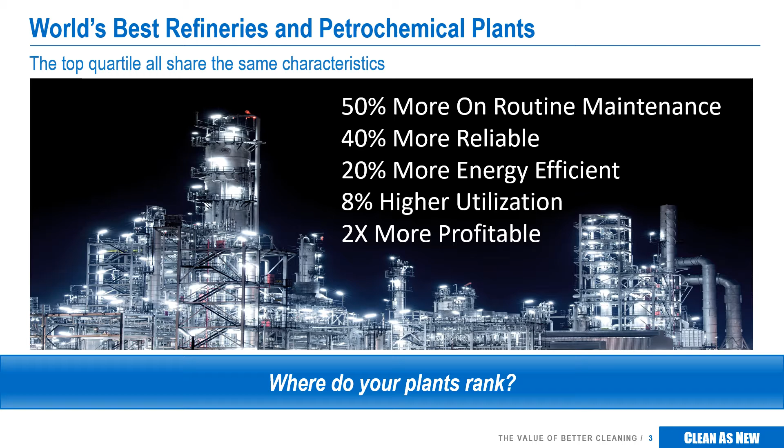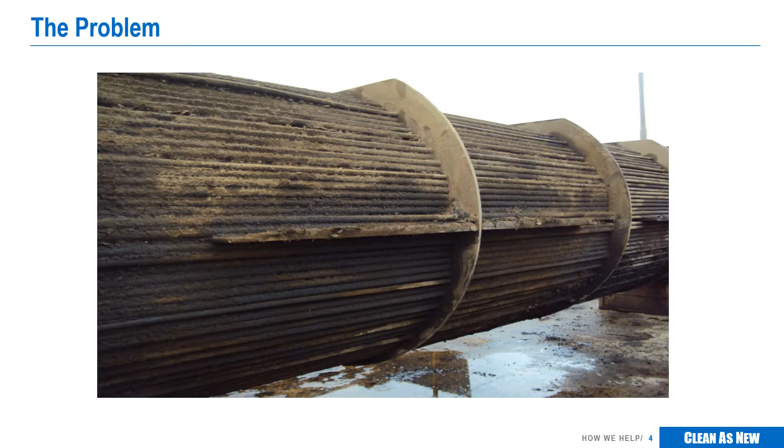Inexpensive feedstocks are a core part of margin strategy, representing 80% of site costs. With these feedstocks come significant processing challenges caused by heat exchanger fouling. The fouling of heat exchangers reduces plant efficiency, and one of the biggest maintenance challenges the industry faces is removing this fouling and restoring plant performance. Unfortunately, today's cleaning methods seldom return heat exchangers back to service above 80% of the design spec. That's the problem that Clean as New solves.

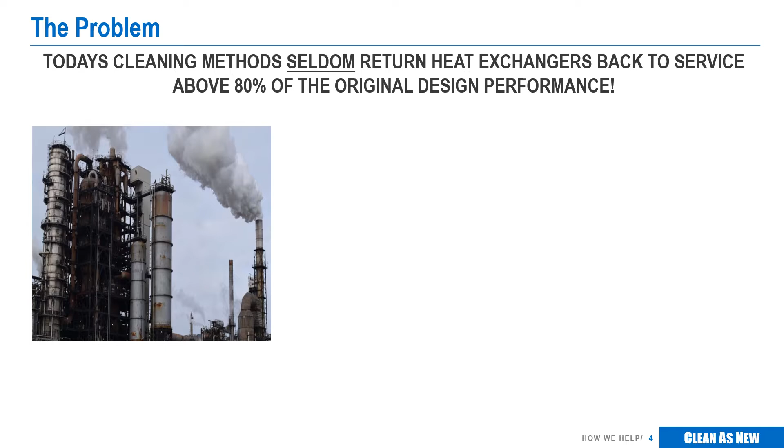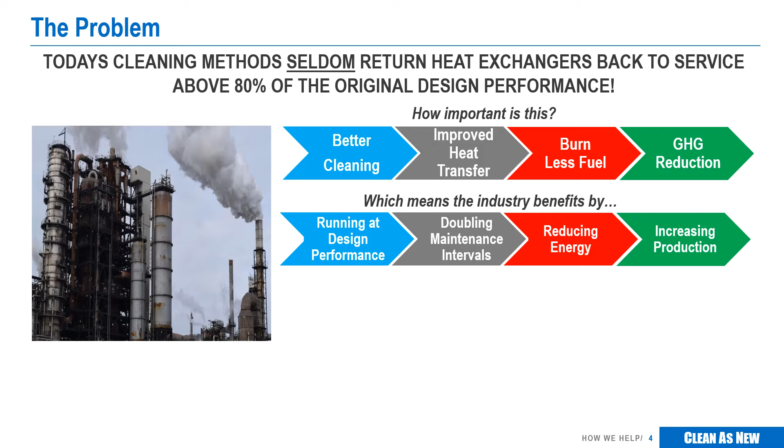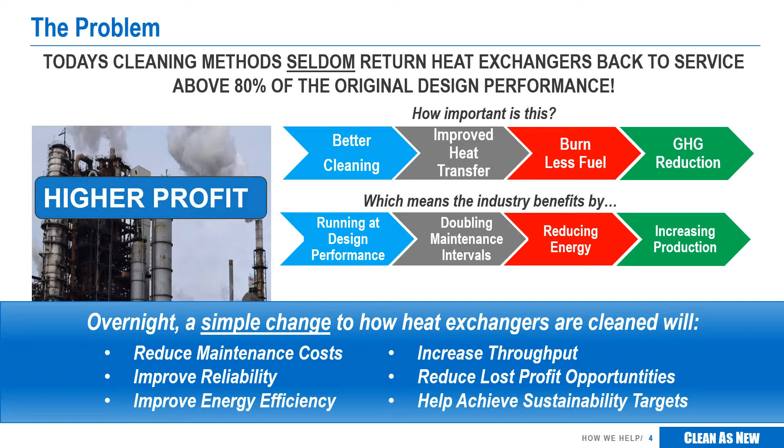Our approach to cleaning allows return to service performance of over 95%. So how important is this? Better cleaning improves heat transfer, which in turn reduces fuel consumption, and best of all, it lowers greenhouse gas emissions. But that's just part of it. Better heat transfer also improves plant performance, lengthens maintenance intervals, reduces energy cost, and increases production, all of which leads to higher profits. Overnight, a simple change to how heat exchangers are cleaned will help our clients address the market pressures, meet their ESG commitments, and improve their bottom line.

For the past few years, we've been developing a simple model to understand the value that cleaning heat exchangers back to 100% of design performance would have on the U.S. refining market. Based on 135 refineries, our model calculates that the impact would be a $6.6 billion bottom line improvement, a 22 million ton greenhouse gas reduction, and a 3 billion gallon water savings, all on an annual basis. Despite numerous testimonials, case studies, and even a few refereed papers, people are understandably skeptical when they first hear these results. To validate our model and remove skepticism, together with our clients, we have participated in numerous measured cleaning trials, using the client's own data to prove that our model predictions are, in fact, correct.

Cleaning heat exchangers to 100% design performance has broad implications with respect to helping address the industry's environmental, social, and governance commitments. At Clean as New, we check all the boxes.

By cleaning heat exchangers back to a like-new condition, the industry burns less fuel, which results in lower greenhouse gas emissions. We're proud to say that we recycle 100% of our process water, using less than 3% of the water consumed today by conventional cleaning methods.

From a social perspective, we care about the safety of our people. Our cleaning process eliminates the risk associated with hydroblasting, reducing liability, and making the workplace safer.

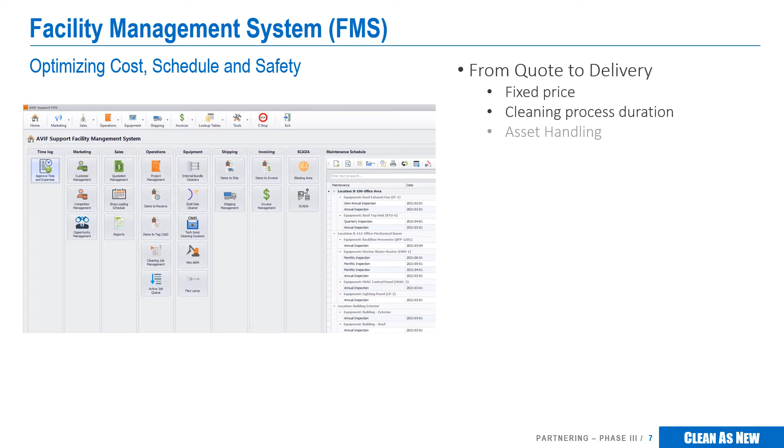We use a custom-built facility management system that tracks all aspects of cleaning operations. From the moment your cleaning service is quoted to the time it is delivered back to you, all aspects of the process are controlled, tracked, and recorded.

The process starts with a quote, including fixed pricing and a guaranteed schedule. For those concerned with schedule, Clean as New provides access through a portal that provides real-time asset tracking through the entire process. The system enforces process, environmental, and safety protocols to ensure the safety of your equipment, the environment, and our workers. Finally, you have access to all the data we collect about the cleaning of your equipment, which can be used to better plan maintenance and outage activities in the future.

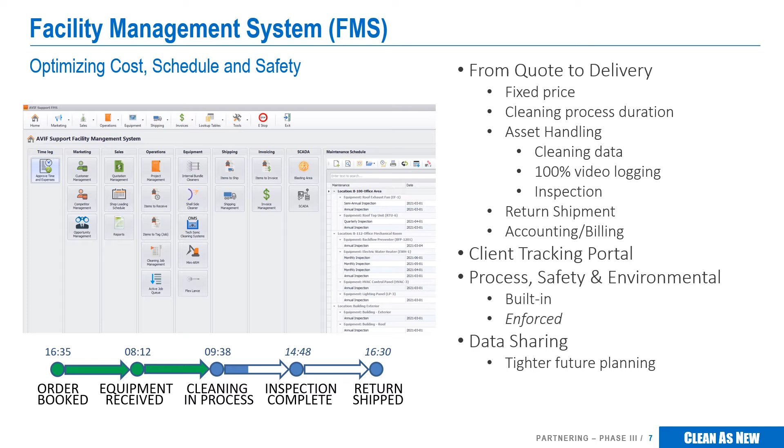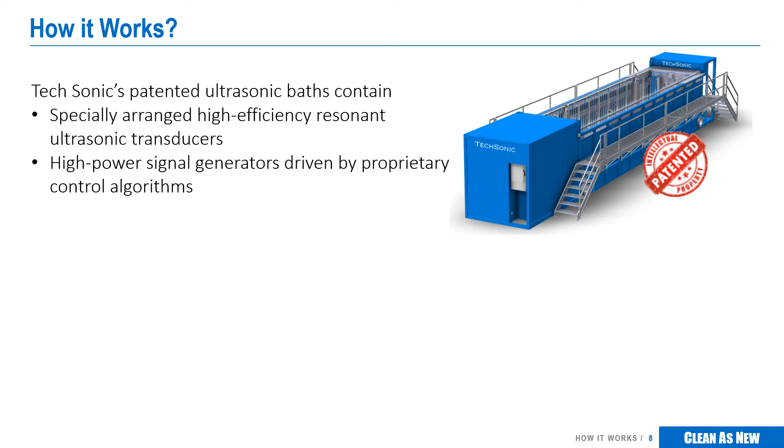It's worth spending a minute to describe Tech Sonic's ultrasonic cleaning technology. We've been building large-scale industrial cleaning baths for heat exchangers since 2009. Our patented technology uses specially arranged resonating rods to deliver precise, computer-controlled ultrasonic energy to our baths, which are filled with specially designed, safe, and environmentally friendly cleaning chemistries. Our unique design creates a uniform energy field within the bath, allowing the rapid cleaning of heat exchangers and parts.

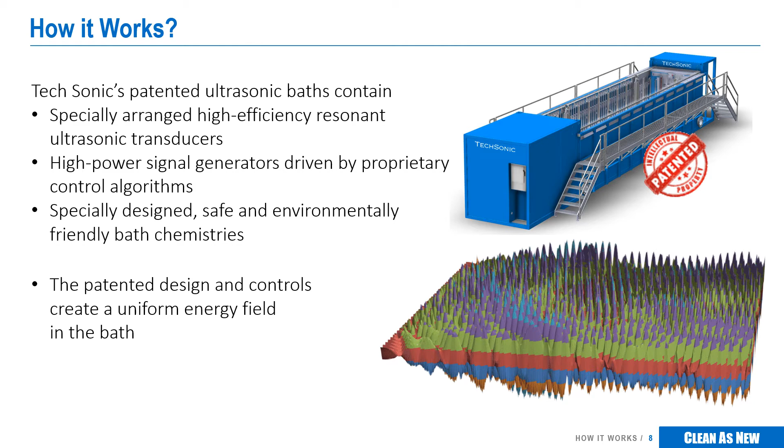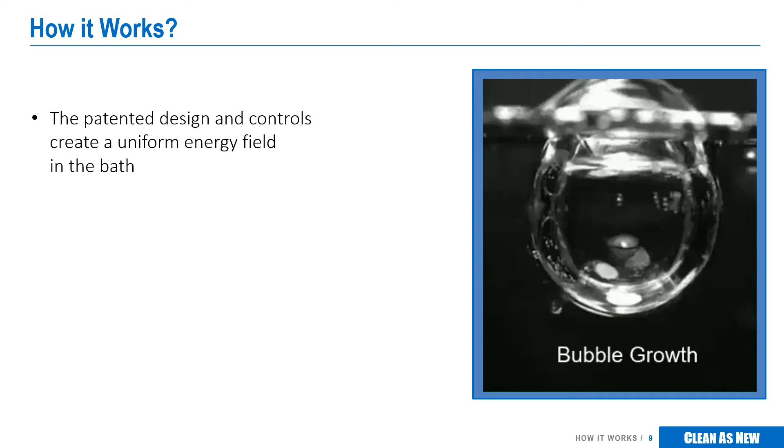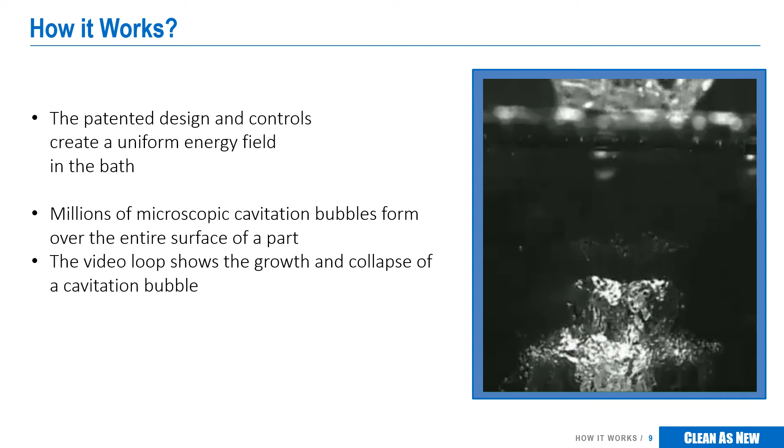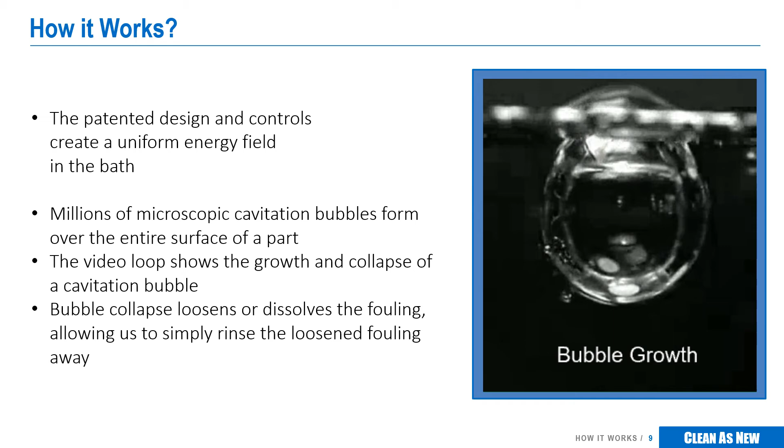Normally, in fluid engineering, cavitation is something to be avoided. However, in an ultrasonic bath, strong cavitation is vitally important because it's the imploding bubbles that do all the work. The ultrasonic energy causes the formation of millions of microscopic cavitation bubbles over the surface of the fouling on a part. The growth and collapse of one of these bubbles is shown in the video loop on the right. During the collapse, a tiny jet and shockwave are formed. These microscopic forces combine to do the work of loosening or dissolving fouling, which allows us to simply rinse the loosened fouling away.

This model simulation shows how better cleaning of a heat exchanger can improve performance. We'll see a real example of this later in the presentation, but for now, consider a typical heat exchanger.

It begins operation at 100% of design capacity. However, as time passes, fouling starts to build up on the surfaces, reducing the operating performance. During the induction period when the exchanger is clean, the initial fouling velocity may be slow, but this will accelerate as fouling collects on the surface.

In this example, we are showing that the bundle is cleaned at a regular interval. For most bundles, hydroblasting alone can never get the bundle back to 100%, so over several successive cleanings, the restart performance continues to degrade.

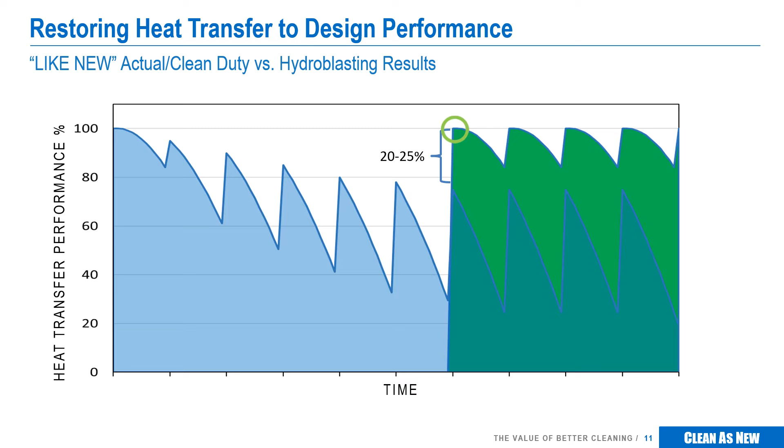Clean as New solves this problem. Our approach allows the bundle to be returned to service at 100% of design capacity. In this particular fouling model, because of the difference in the shapes of the two curves, a 20 to 25% improvement in return to service performance results in a 34 to 38% performance improvement over the next interval.

There's another benefit that this simulation highlights. By using the same fouling level as the trigger to clean the bundle, rather than the same fixed interval, better cleaning offers the opportunity to more than double the run length, reducing maintenance costs and improving production, while still reducing overall energy consumption.

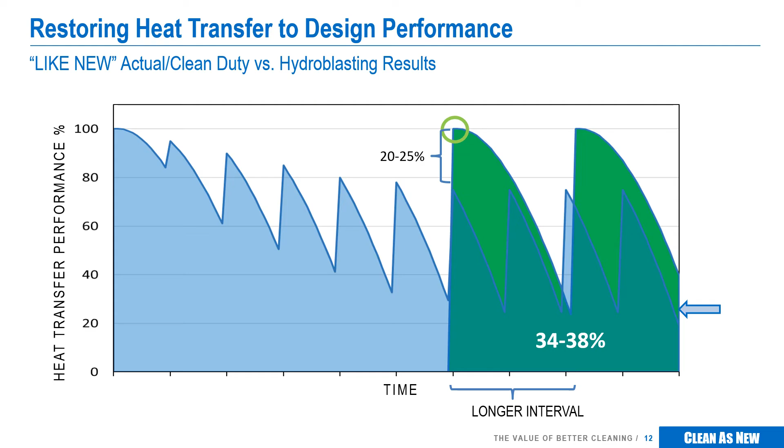We're serious about proving the value of our technology and earning your trust. To do this, we have a three-phase approach.

First, we will work with you to prove that the way we clean heat exchangers will reduce your costs and improve heat transfer performance. Next, we want to prove that we can deliver these results consistently. And finally, after proving the value of our approach to cleaning, we will provide you with a long-term heat exchanger performance solution.

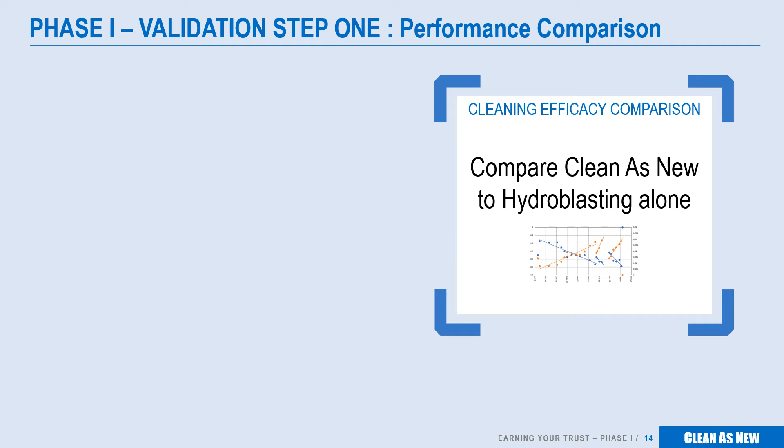The first phase is a set of measured trials, and in the first step, our goal is to validate using your own data that our cleaning delivers the improvements we are promising. This includes free bundle cleaning from each of your plant's crude preheat, FCC, coker and cooling water services. That's 4 bundles cleaned for free.

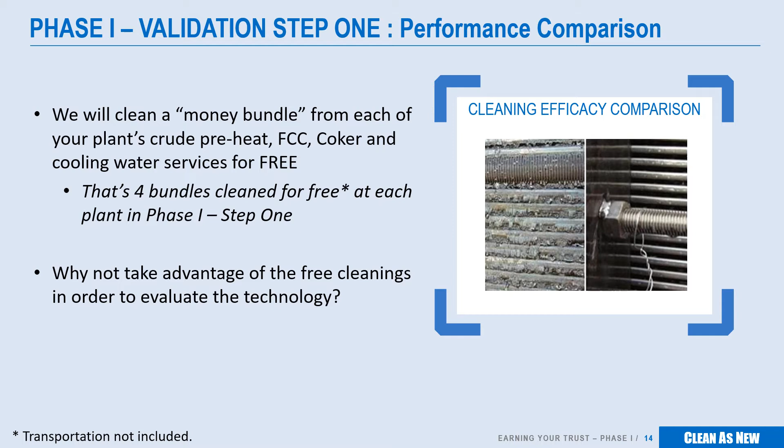We'll work with you to use the historical pre- and post-cleaning data to calculate the dollar value of better cleaning. How much can you save? Here's an example of the type of data generated during a trial.

This is a dataset from a client's FCC slurry steam generator. These are some of the worst fouling service bundles, and heat recovery performance of these units directly impacts the operational capacity and cost of the FCC.

The data shows these bundles were previously cleaned to 73 and 79% by hydroblasting. Clean as New was able to return these bundles at 97% in less than half the time normally required for hydroblasting. The calculated dollar impact of better cleaning in this case is over $700,000 per year, with an estimated greenhouse gas reduction of 9,733 tons of CO2 equivalent.

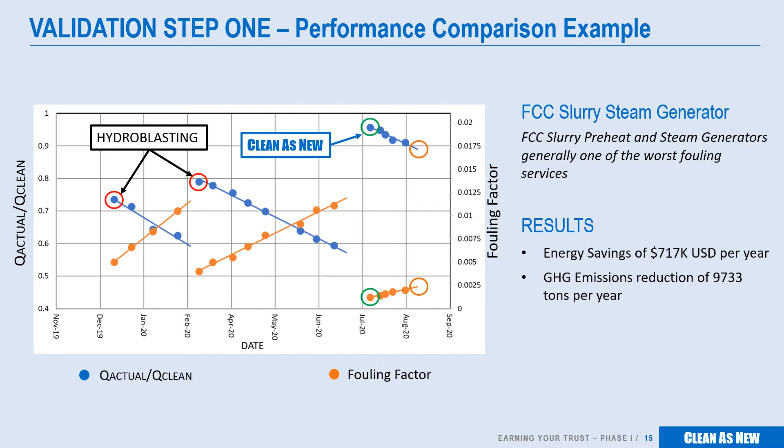There's another really important feature evident in these results, and that's the slower initial fouling velocity observed after a more thorough cleaning. The previous interval between cleanings were approximately 2 and 3.5 months.

If we bend the initial fouling curve to match the post-induction behavior seen in the previous intervals, and the same cleaning performance trigger is used, we see that the interval can be extended to more than double the previous average, providing not only the runtime, energy and performance improvements, but cutting the required maintenance by half.

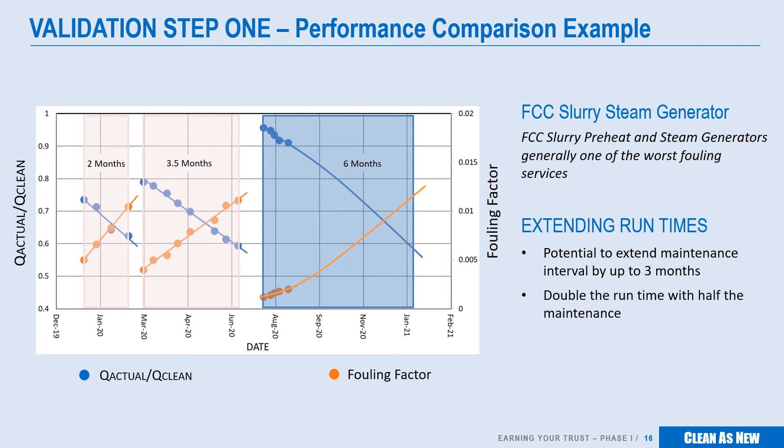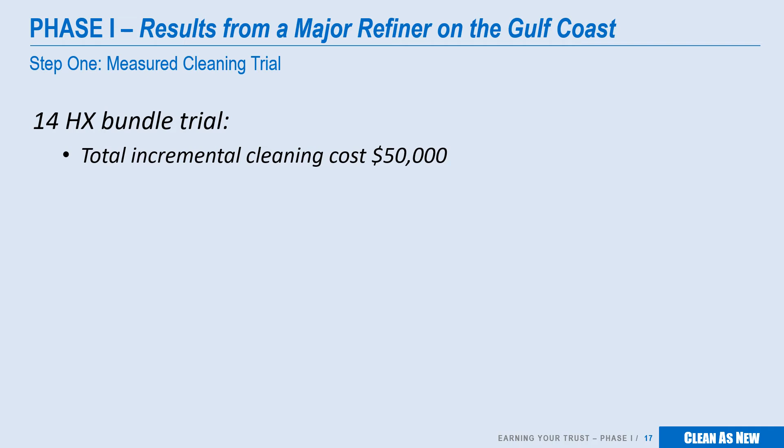Here are results from a 14-bundle trial with one of your competitors. The client's incremental cost over hydroblasting was approximately $50,000. This incremental cost is based only on the hydroblasting portion of the overall expense, and does not include all the other costs associated with operation of the wash pad, like cranes, water supply, wastewater management, etc.

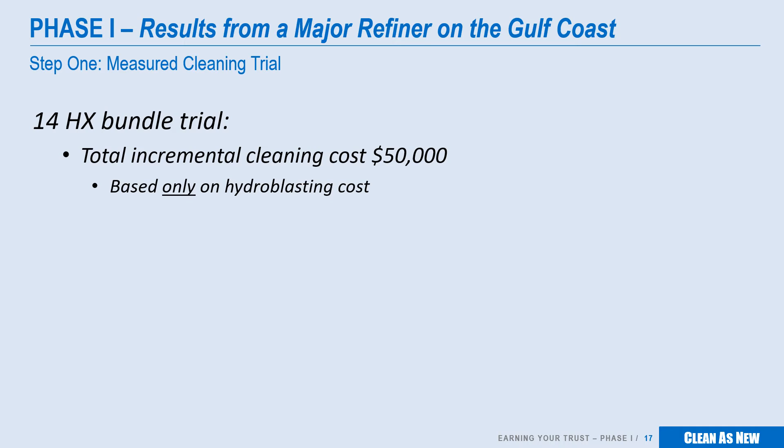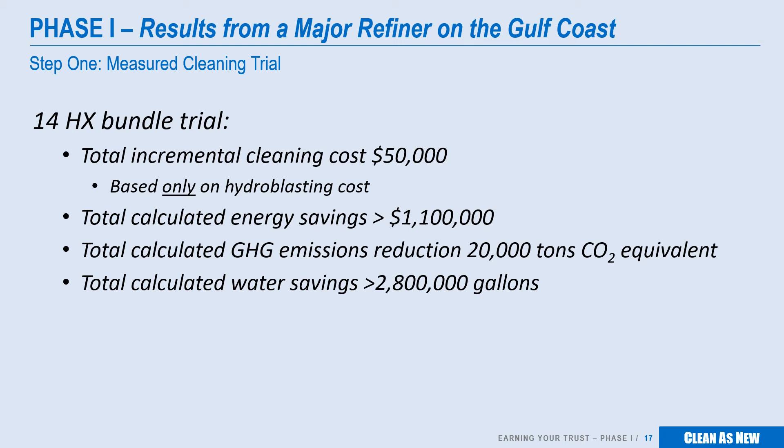If all costs are included, then the clean as new cost is actually less than the wash pad cost. The calculated energy savings was over $1.1 million, with a greenhouse gas reduction of 20,000 tons and a water savings of over 2.8 million gallons. In this case, the benefit to cost ratio in this trial, based only on hydroblasting, was over 20:1.

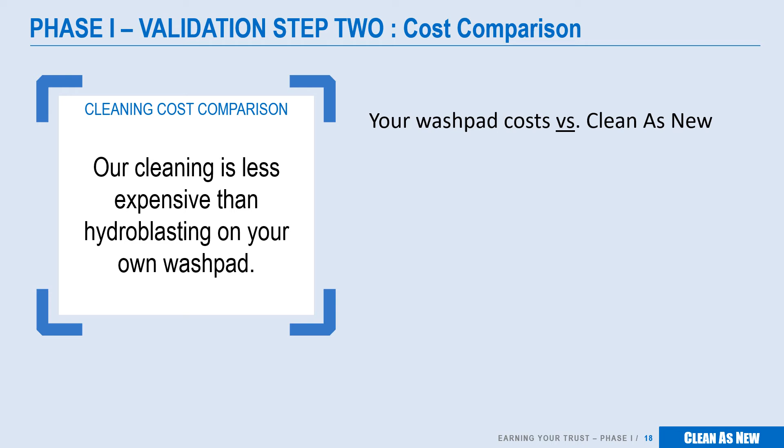Step 2 of Phase 1 is to compare the cost of cleaning. Our goal is to prove that our cleaning is less expensive than cleaning on your own wash pad. We'll work with you to understand the total costs of operating the wash pad, and as a part of this step, we'll clean another couple of your bad actor heat exchangers for free.

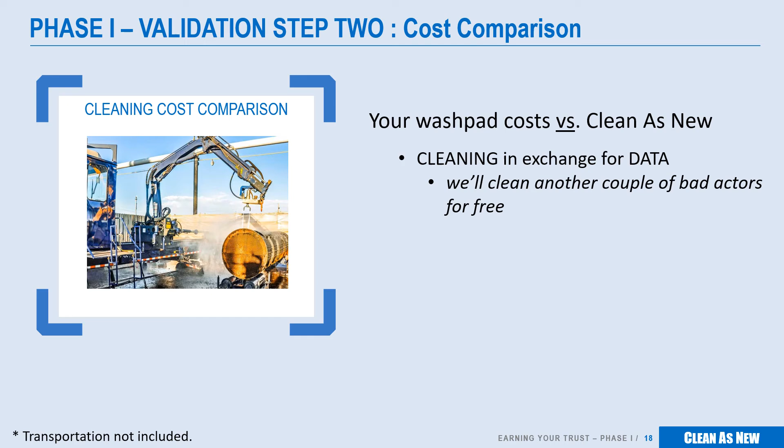Then, with the details of a previous turnaround, we will provide you with the fixed, guaranteed, clean as new price for the same scope of work.

How much could you save? We've already helped several clients answer this question, and here's an example.

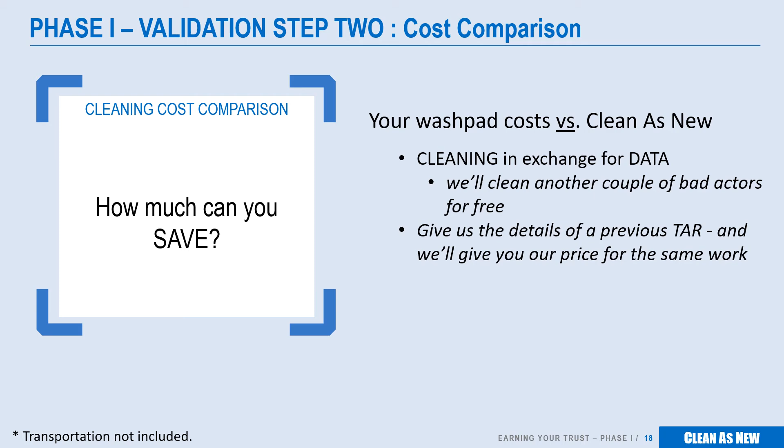This data comes from a major refinery on the Gulf Coast. They provided us with a detailed list of 51 heat exchangers cleaned during a recent turnaround and a total wash pad cost for the exercise. We then provided them a guaranteed price for the same scope of work, including transportation from their site to our Baytown facility and back.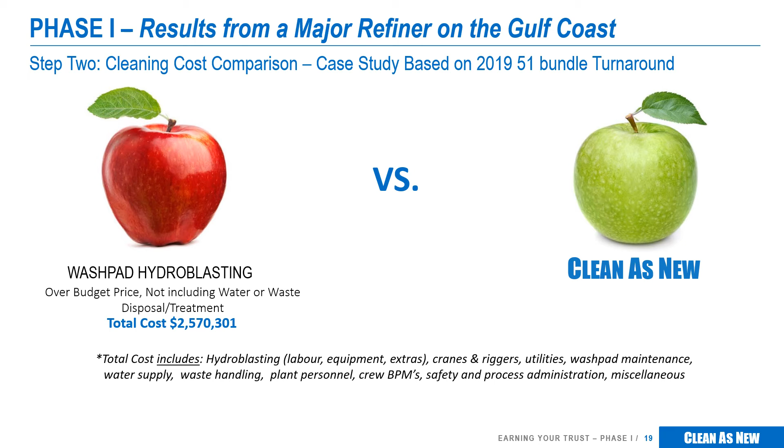The results validated our claims. The client's cost was over $2.5 million, not including the cost of water and wastewater treatment. Clean as New's cost for the same activity, including water and treatment, and with better, faster results, was less than 50% of what the refinery actually spent.

In this case, we were able to show that our price, for faster cleaning with superior results, would have saved this client over $1.4 million.

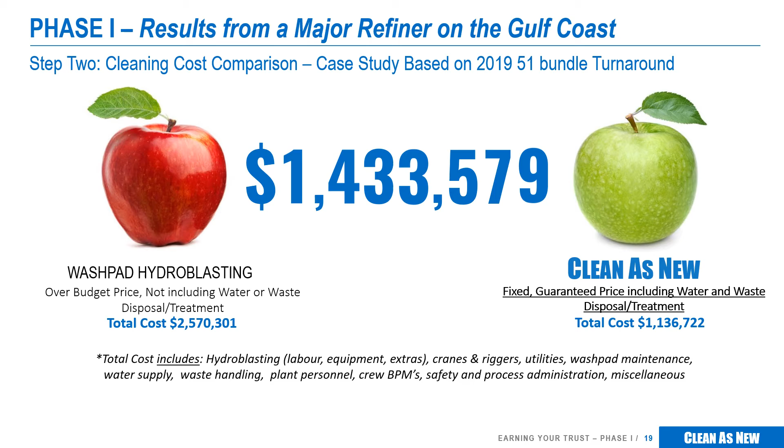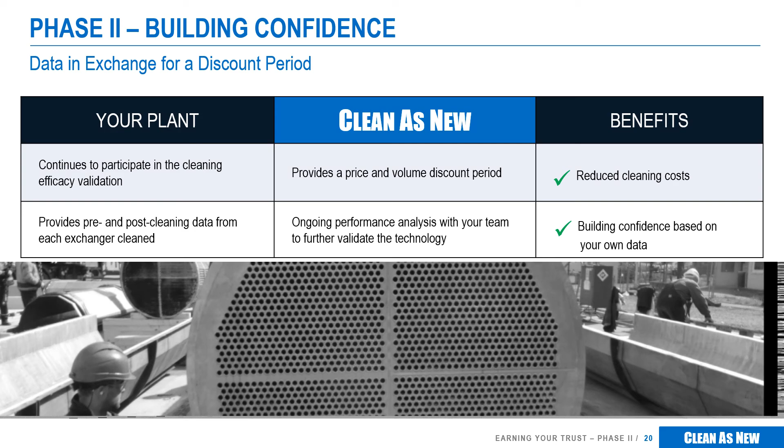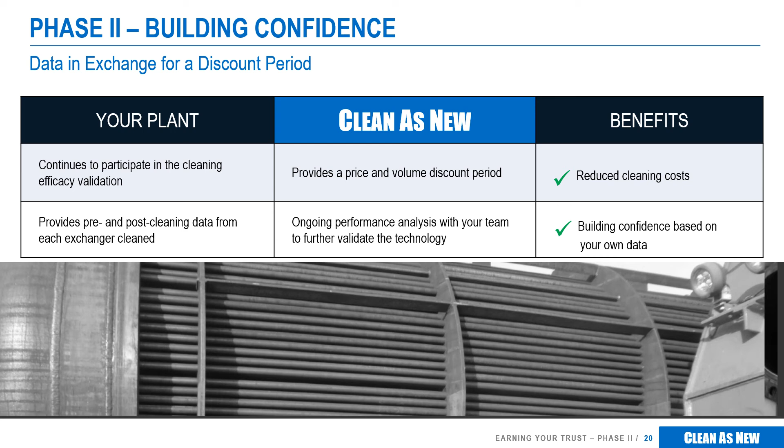With a few successful measured trials completed and a good understanding of the cost savings, to help further build confidence in the technology, in our ability to provide the services, and to better understand the overall economic impacts of better cleaning, we will provide an introductory discount price period in exchange for continued data sharing about historical and current heat exchanger performance. We will continue to work with your experts to maximize the benefits of the program, while providing a cost savings to your maintenance budget.

We are confident that at the end of the introductory pricing period, armed with your own data demonstrating the maintenance, operational and environmental savings, the decision to adopt our approach to cleaning will be easy.

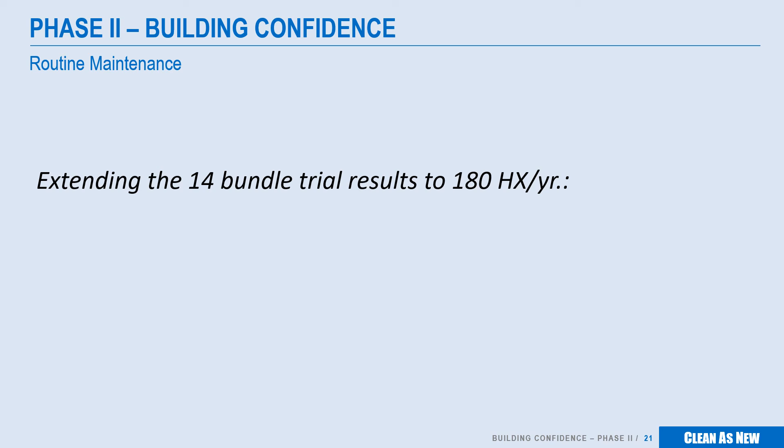Our 14-bundle trial client is now moving to Phase 2, which includes the cleaning of 180 bundles in the annual maintenance plan. Extending the trial results, our client anticipates an energy savings of over $14 million, with a greenhouse gas reduction of 258,000 tons and a water savings of 36 million gallons.

And what about all the other savings? What is the value of improved performance? Or doubling your maintenance intervals? How much can you improve throughput? Industry experts like Becht have advised us that the total value is 5 to 10 times the energy savings.

Could improved benchmarks put you in the top quartile? And let's not forget the safety of our people. What is the value of eliminating the risk associated with hydroblasting on your wash pad?

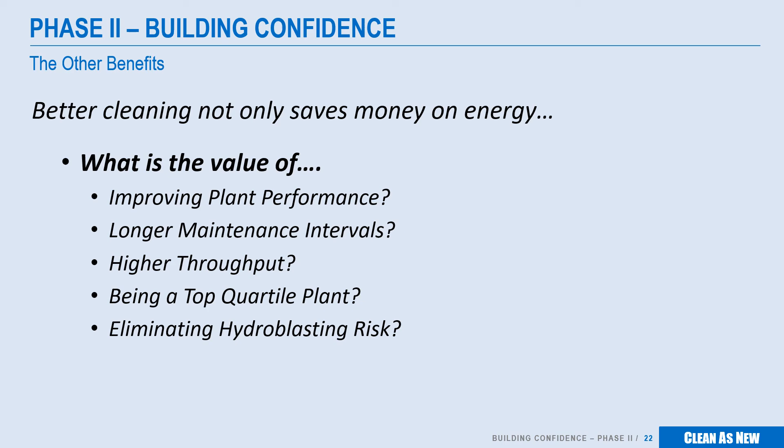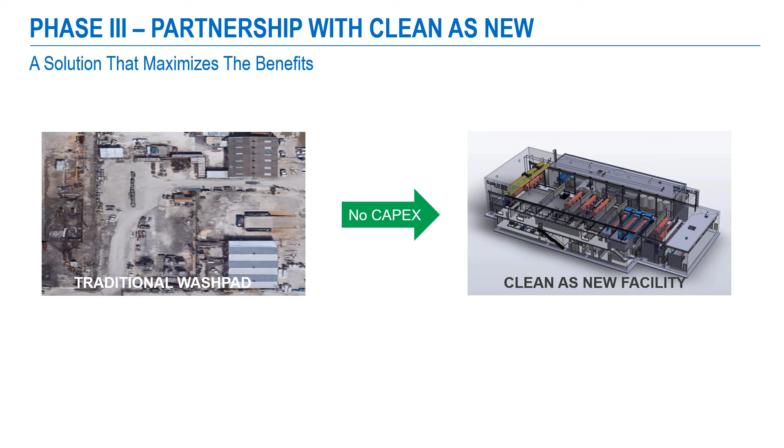With the data from Phase 1 and 2 clearly demonstrating the overwhelming value of clean as new, the final phase is to form a strategic partnership that will replace your existing wash pads with dedicated clean as new facilities. This will allow you to reap the maximum benefits of our cleaning technology, and we propose to build it at no cost to you. That's right, there is no capital expense to adopt our cleaning technology for all your wash pad requirements.

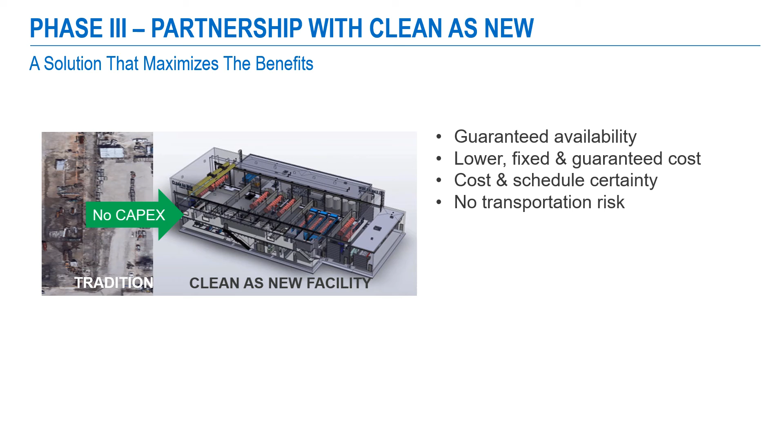A dedicated facility provides guaranteed availability along with lower, fixed, and guaranteed costs. Because the facility is dedicated to your needs, you have both cost and schedule certainty and no transportation risk. You also will eliminate the risks associated with wash pad operation and reduce water use and wastewater generation by over 95%. Finally, our data-centric approach aligns well with digital transformation strategies, allowing better maintenance optimization and tighter planning.

With a price and performance guaranteed contract and no capital expense to you, we will design and build a dedicated facility, sized and tailored to meet your exact requirements and budget. What we want in return is a long-term commitment for cleaning everything currently cleaned on your existing wash pads.

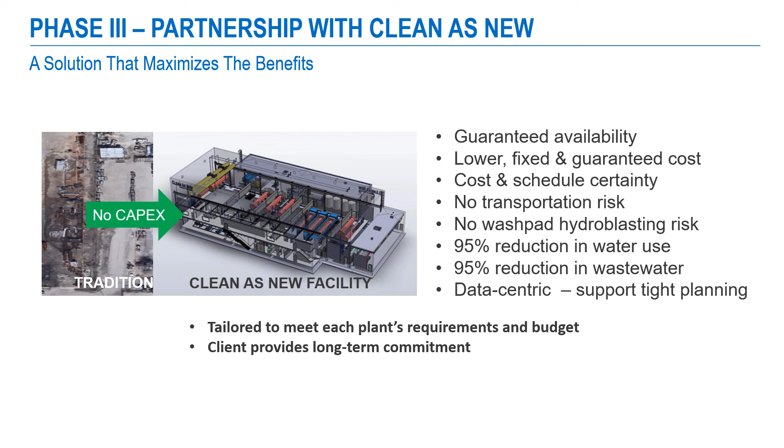At Clean as New, we've assembled an experienced and diversified team covering all aspects of the business, and our advisors are some of the smartest and most respected people in the industry.

So why partner with Clean as New? First, the environmental benefits of better cleaning are significant. A 10 to 15% reduction in greenhouse gas emissions and a reduction in water consumption by 95% helps meet ESG commitments and goes a long ways to demonstrating good environmental stewardship.

Next, with respect to operations, cleaner heat exchangers will result in better plant performance and help elevate you into the top quartile. Finally, by meeting your ESG commitments and sustainably improving your bottom line, you will help retain and attract investment. It all adds up to one thing: a competitive advantage.

At Clean as New, we look forward to working with you to prove the value of our technology and the impact we can have on performance. Our goals are to improve plant efficiency, reduce costs, help the environment, and to replace the wash pad with a cleaner, faster, safer, and greener alternative.

The first step to higher performance through better cleaning by Clean as New is to identify heat exchangers which are suitable for the measured trials. We will work with your engineers to select these, clean them, and complete the data analysis.